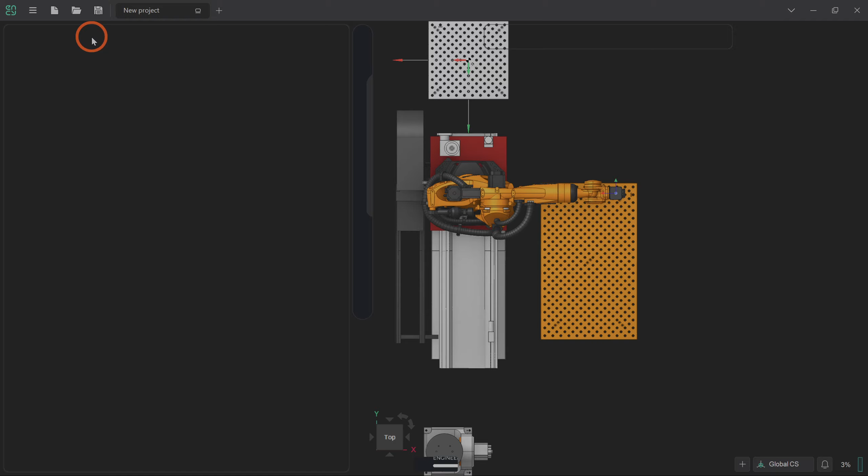Hi, so in this video we're going to be importing and setting up the roughing operations on this workpiece. So we're going to the model space and we're going to import the file. We'll just go through the standard checks to make sure it's all placed properly. So locate 0, middle, min, apply, move it up 50 millimeters in Z. Oh, 50, not 500. Apply and close.

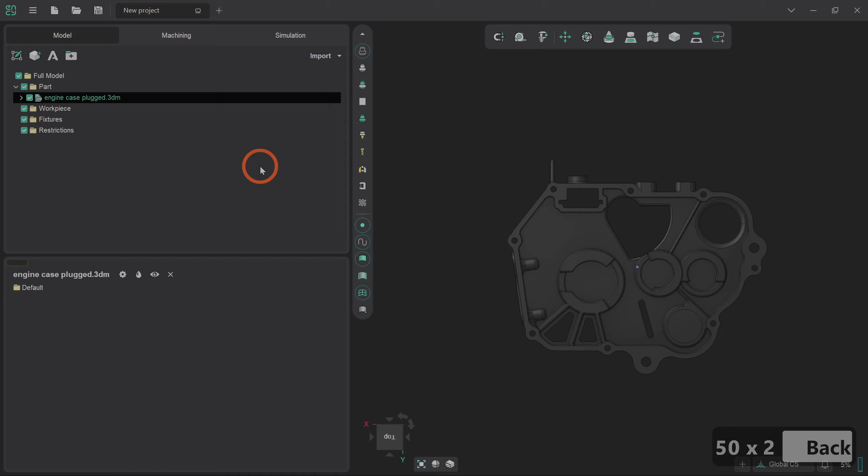And now we're going to the machining environment, and we can see it's automatically placed itself on the small table in this environment. I'm going to switch around to this view here just because it's generally easiest to work out what's going on from here.

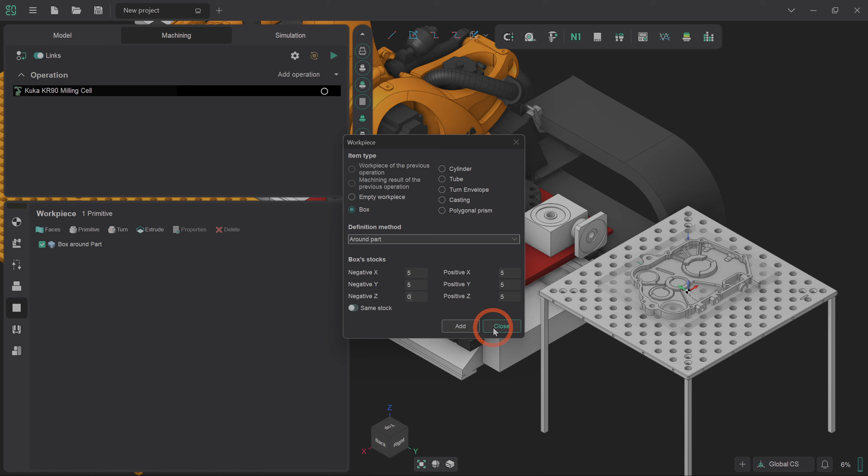So beyond this point we need to define the workpiece. So I'm going to set this to be a primitive box around the part with 5 millimeters of excess in each plane, except for in negative Z, because we've got no way of machining under this, because the whole purpose of this series of videos is to utilize the basic 3D functionality. So the robot will be operating in much the same manner as a traditional 3D mill will in this instance. So add and close.

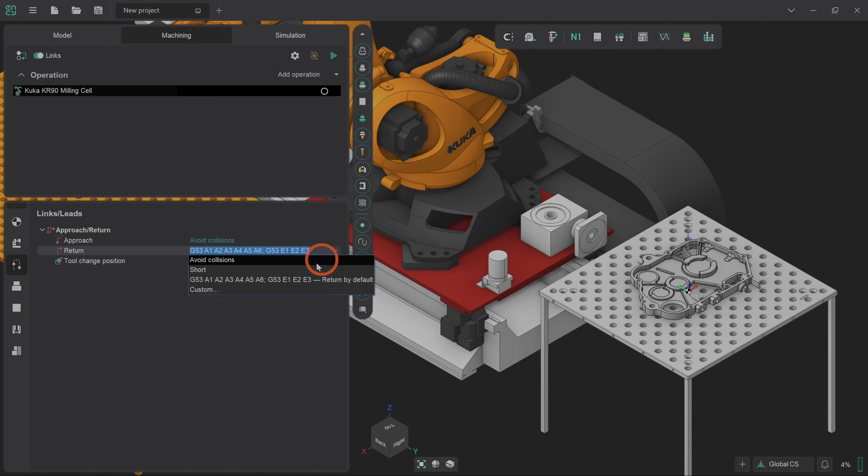Right. Now, one of the things that we can do to define the orientation and management of the robot to try and limit any future problems, instead of defining the tool orientation for each and every operation, if we set the 6th axis control to a fixed vector, this means that the orientation of the 6th axis will stay locked in that Z orientation. So we won't have to deal with defining tool orientation or axial approach for each and every operation, hopefully. We'll also set the links to avoid collisions because although there's not a lot of very complicated high-sided topology in this model, it is generally the best approach philosophy for this particular style of machining as well.

So now that that's done, we can define our first operation. And I'd like to change the way that we work in this slightly. Since we're emulating a 3D milling process, we're going to be using a lot of setups in this, not to their fullest extent. In the case of a standard milling application, you can use setups to define different layouts of the workpiece and everything. For this, it's purely just to make sorting through our operations a bit simpler and a bit easier to remember. So I'm going to go to structure and add a setup stage, which we are going to rename, and you can do this by right-clicking and selecting rename or just pressing Ctrl R. And we're going to call this the roughing. Just call that roughing for now.

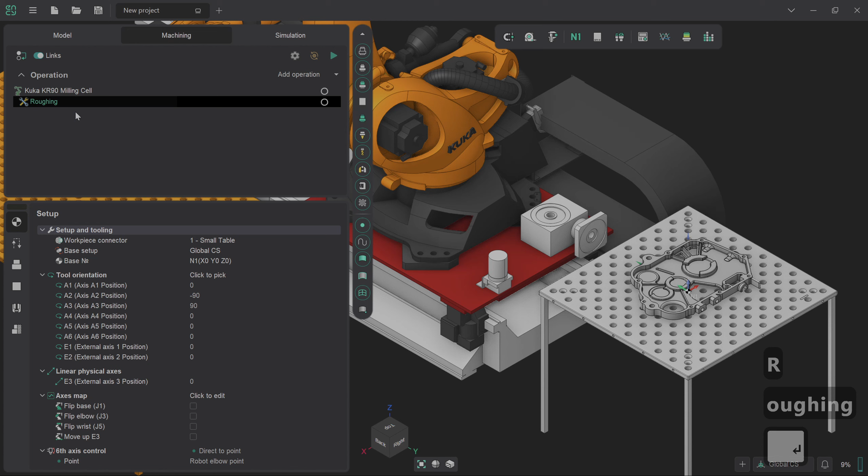And the first operation we're going to add is going to be a 3D entry face milling operation. Now we can see that it's automatically lost the 6th axis control orientation, which is not ideal, but it's an easy fix as opposed to having to go through the full traditional system. Now, if we set in parameters, we want the tolerance to be a little bit looser than that, just for the sake of a faster calculation. So we're going to press 0.02. I'm going to turn off check for plunges because I found with this job in particular, we get a lot of iterative complaints about plunges that don't actually affect the final outcome in the slightest. So I'm just going to default to turning that off for the moment.

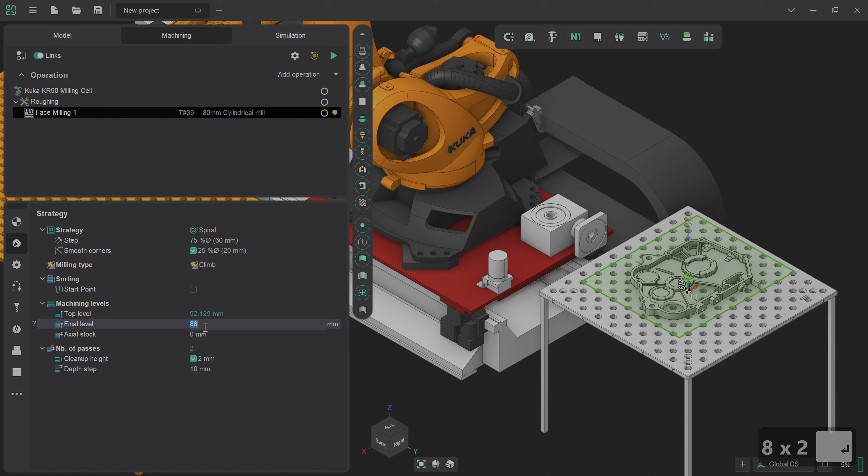And under strategy, we can see these levels that we've got here. So 92.129 corresponds to the very, very top of the material. 87.129 corresponds to the top of the actual object. So I'm going to increase that slightly to give us a little bit of extra material to work with in later operations. So I'm going to type in 88 millimeters here, and we're going to try generating a toolpath. And as we can see, there are some parts that it can't reach in its current orientation because it doesn't quite know how to, and we've got some very strange links and leads coming in here.

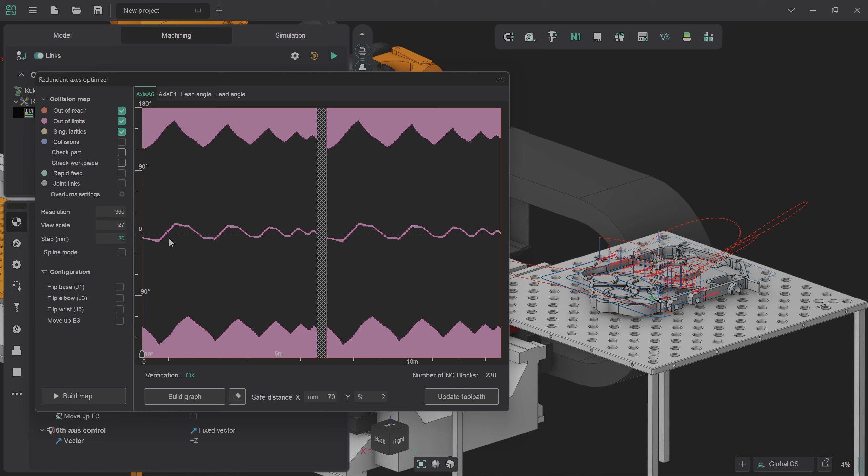So if we now go into the axis map, we should be able to see the culprit for this problem. And as I suspected, we have a lot of out of limits issues, specifically centering around the 0 degrees deflection point here. This is due to the fact that in, I suppose, what you could call a zero position for a robot, because it's so close to a series of fixed parameters, it can hit a singularity very quickly and it can effectively lock itself up. So we need to deflect it from this very slightly just to be able to give it the best chance of calculating. It's one of those situations where the kind of thing that a much simpler machine can do with great ease a robot struggles with. Obviously, these particular instances are relatively few and far between, but you do need to be aware of them.

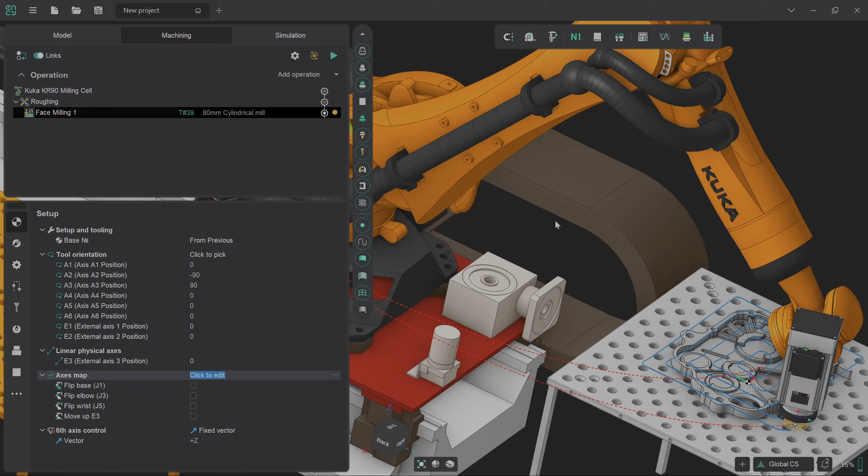So if we click on Build Map now, and then Build Graph, and then we update the toolpath accordingly, we can see how there's been that alteration in angle for the 6th axis orientation, but we've now got a completely clear toolpath here. So that means that we've now got a perfect spiral toolpath that will clear up the first pass of the material for it, which is great.

So the next thing that we're going to do now, sorry, just adjust the zoom slightly, is we're also going to set up a roughing waterline path. So we go to the Add Operation menu, and under 3D Entry, we go for roughing waterline. Now, this 80mm tool is going to be too large to really get into a lot of this, so I'm going to adjust the parameters of that slightly.

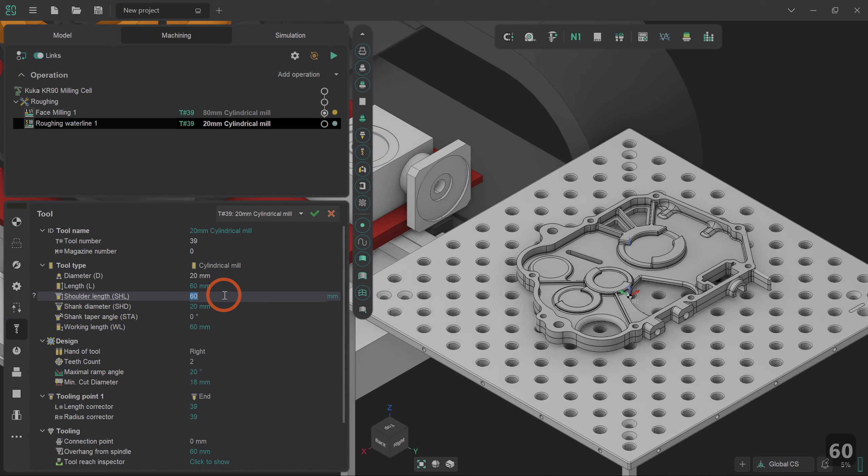Obviously, when you're setting up a job like this yourself for the real world, you'll have a list of tools available to you that will be in your tool table. Because this is purely hypothetical, I'm going to invent a couple of standard tools that we'll use throughout this. So we're going to go with a 20mm diameter and say a 60mm length. So it's still quite a chunky tool, should be good and solid. We'll press Apply Changes and create a new tool.

So that's great. And we need to define that 6th axis control. Okay, looks like I got that wrong at the very beginning. We also need to define where we want this to actually go on. So I'm going to tell it that I want it to be able to do all of the waterline roughing inside this region. And the easiest way to do this is to be able to grab one of these edge lines and then just tell it to chain all around. So I'm going to turn on Select Edges. I'm going to double click on that and you can see how it's automatically grabbed the entire chain.

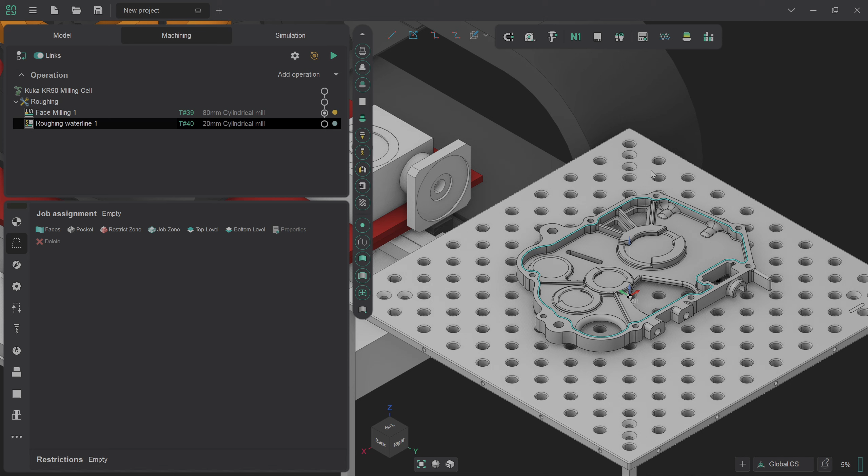9 times out of 10 this will behave exactly as you hope it will do. However, sometimes when you're dealing with more complicated topologies, the chain won't necessarily follow the order that you initially expect. So as with every other kind of 3D selection tool, you can still use Shift and Control to select and deselect individual parts as well. So I'm going to set that as the job zone.

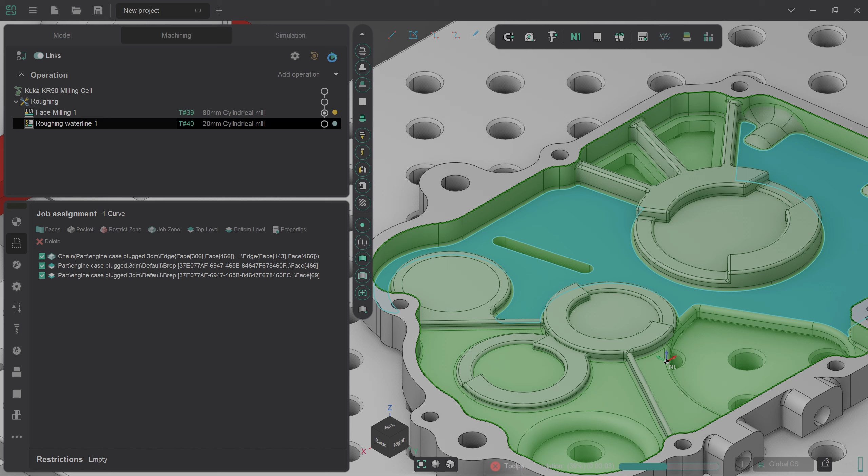I'm now going to define this as the top level and this as the bottom level. And from here, I am going to generate the toolpath. And we should see the same issue again where it can't reach everything. So we'll go back into the axis map.

Now, there we go. Now, fortunately, due to the relative simplicity of the part that we're working on, axis mapping is not an incredibly long and painful process. Although when the toolpathing starts to get more detailed and intricate, this will slow down significantly. So I will be pausing for the duration of those just to save you from spending 10 minutes watching not much.

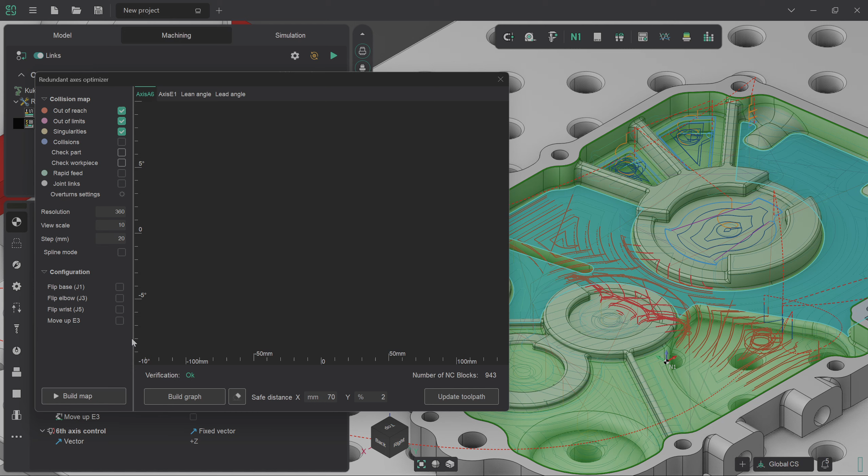So again, we have all of these difficulties around the 0 point on the 6th axis, so we need to deflect a bit from that, which is fine. So build the graph, update the toolpath, and now we have this lovely clear roughing area. And I suspect that this complaint here is about a plunge move. So again, we're not really super worried about these at the moment. The plunging approach is generally fine. The tool will be spinning fast enough to be able to accommodate a simple plunge. So I'm going to turn off check for plunges for the moment, just to keep these clear.

I'm aware of it in the back of my mind, and obviously when prototyping a toolpath like this, the first thing you do is you do check with a very, very slow dry run. But yeah. So for now, we're just going to simulate what we've got, and since we're using solid body simulation on this, we should get a much more accurate read of what the final cutting is going to look like, as opposed to using, say, the voxel simulation, which is much better for things like sculptural elements, but when it comes to hard material machining like this, solid body is significantly more accurate.

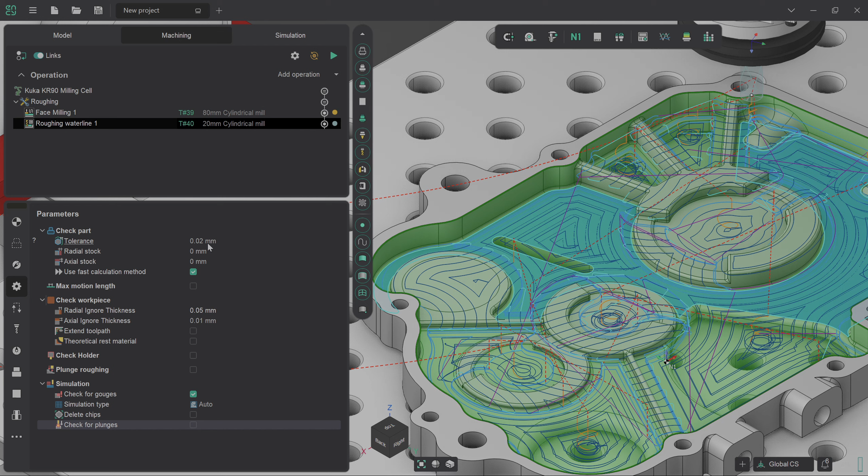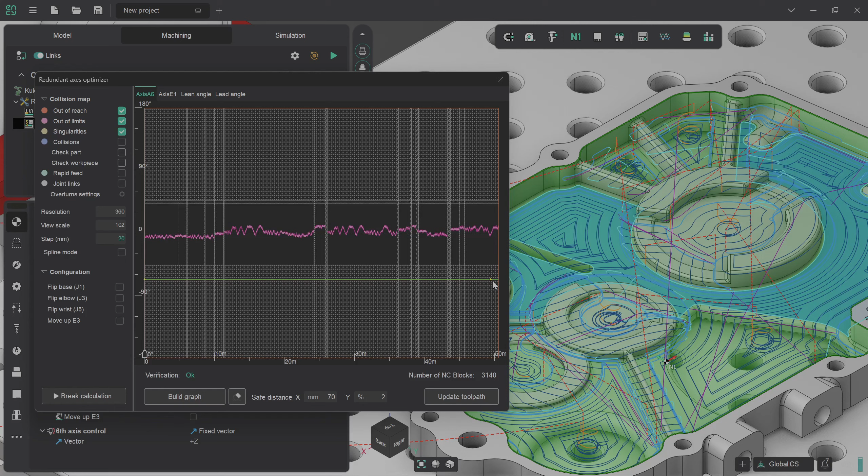And something that I have just noticed, which I hadn't set in this, is I haven't given myself any kind of stock allowances here. So again, I'm going to set this to 0.2 for speed. I'm going to add a millimeter radial and a millimeter axial stock, just so the finishing passes actually have something to do. And that should regenerate with the same parameters it had before, so we should be good there. We'll just double check the axis map just to be certainly sure. As we can see, it's extended a little bit there, but we've not got any surprises.

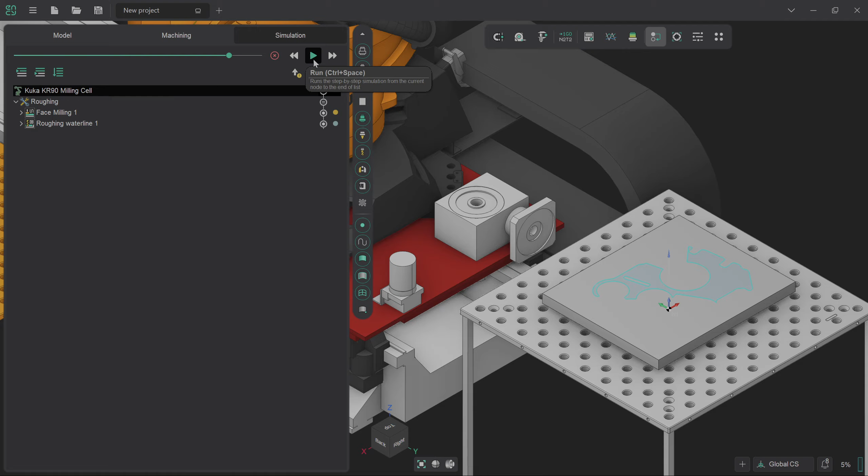So we'll rerun that calculation, build the map, update, and now we can simulate just to make sure that our part is good. So I'm going to zoom back out and then come in a little bit closer, and we'll speed up the simulation. And we are going to be stopping and simulating multiple times throughout the setup of this, because realistically, it is the kind of job that needs a lot of checking throughout. So we'll run this now, and that's our initial facing path. That's good. And we've now got our waterline roughing, which is nice.

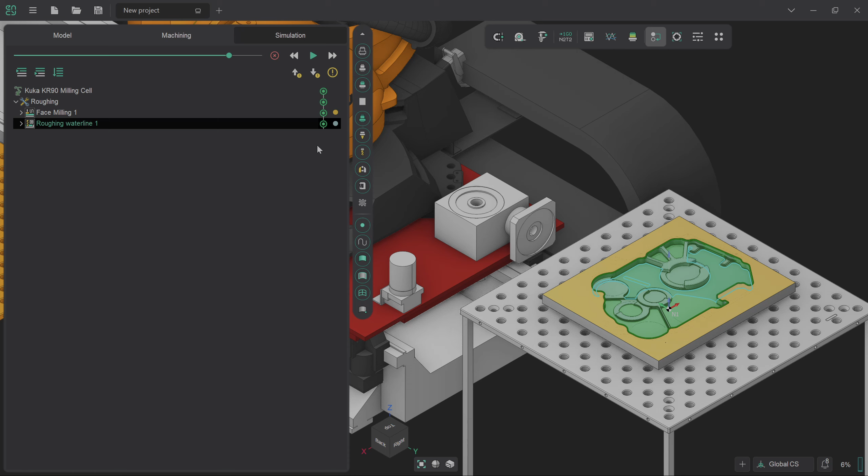Seems to be going well with no complaints so far, which is exactly what we're after. We now have nice green node statuses throughout. Obviously, the fact that we turned off plunge detection will affect that, but you know, that's a relatively minor thing, and something that, since we're aware of it, it becomes less of a problem.